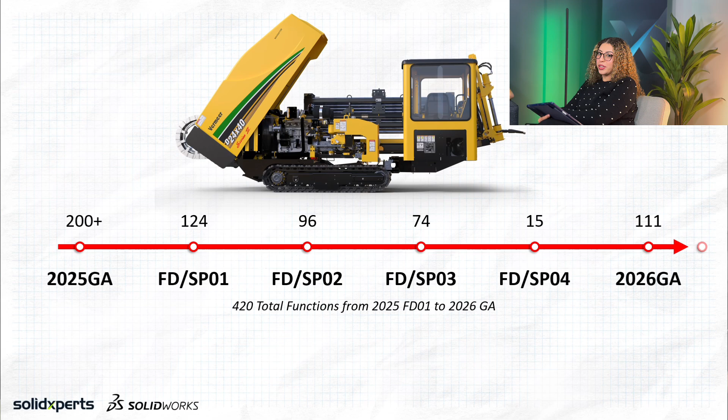Ready? Let's go. I'll be with Eddie to talk you through the highlights of SolidWorks 2026, and trust me, it's really impressive. Good afternoon, everyone. It's always great to be back with Lena and the gang here to go over the great new features being introduced in SolidWorks 2026. So between 2025 FD01 and 2026 GA, there have been over 420 enhancements released, and 2026 will continue to deliver value in each functional delivery throughout the year with performance improvements, software stability, and user-centric enhancements.

So at 22,000 pounds and capable of 24,000 pounds of thrust force, the Vermeer horizontal directional driller has become an industry standard over the last 50 years. These drillers are designed for laying fiber optic lines, power cables, and other utilities without the need to trench, making it possible to incorporate these utilities underneath existing infrastructure such as roads, bridges, and sidewalks.

So this data set will be our roadmap today as we walk through what's new in SolidWorks 2026. All right, here we are, the new features of SolidWorks 2026. This is the part we all wait for and where we find out what's going to save us a lot of time and maybe a few headaches too. So this year, get ready. It's faster, more precise, and practically built for you.

Absolutely, Lena. So the main goal is to make design faster and more intuitive. With the new on-demand component loading feature, you can now open up only the parts you need. That means a huge performance boost, especially when working with large assemblies.

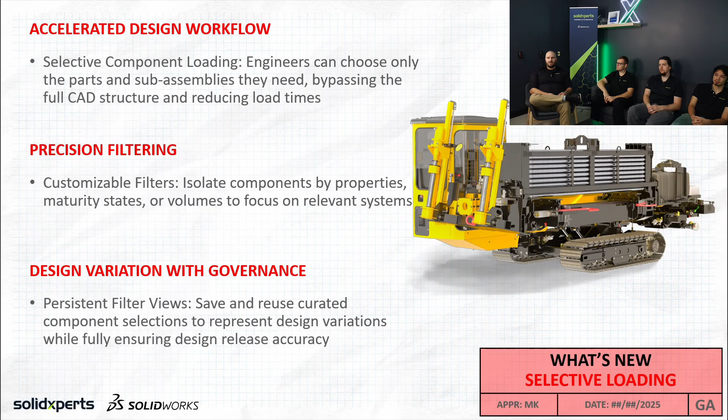So working with large assemblies can be challenging. The only way to have total context of your design is to open up the parts that you don't need in order to get to the parts that you do need. Selective loading allows us to start in a lightweight browser application in order to filter out the parts that we want to work on. Here we can graphically select the parts we want, completely independent of the underlying CAD structure.

And save this filtered view for later on. Instead of waiting for every mate reference and component to load, we can open up the filtered view with only the parts we need in order to begin designing faster.

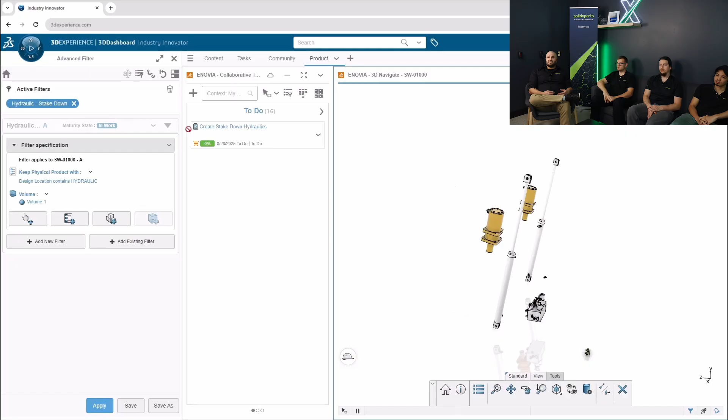Filtering goes much further than just parts or subassemblies. We're able to filter by custom properties, maturity states, or even volumes. These filters can be assigned to tasks as well for efficient design communication. This eliminates the time spent opening and digging through large assemblies, allowing designers to work with more specific model information.

As mentioned, these saved filters can act as curated views representing different variations of your assembly and can be referenced directly in your design documentation, meaning that you can reference these views in drawings, keeping your documentation accurate and up to date, while showcasing exactly the components you intend.

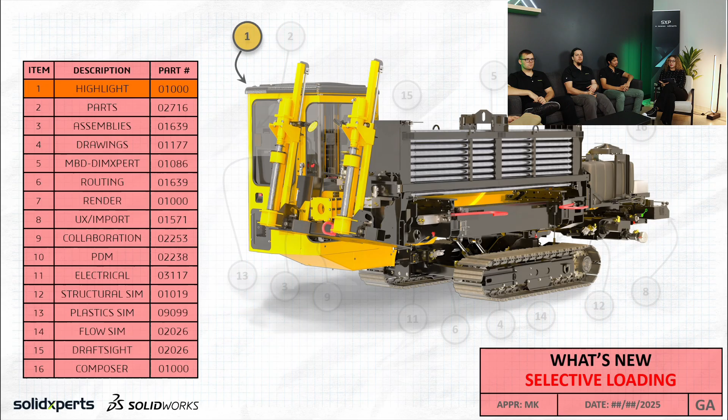It's really interesting. So that means less loading and more efficiency? Sounds like everyone's going to love that. Now we've seen the main highlights. I'll let Eddie keep going, there's a lot of things to see. Much appreciated, Lena. There's definitely more to explore, as powerful part creation and modification is what we've come to expect from SolidWorks.

SolidWorks 2026 continues to enhance part creation with new improvements to sheet metal, equations, structure systems, the ability to leverage Cutlist properties for PLM and ERP systems, and enhancements to reference geometry.

New for sheet metal in SolidWorks 2026 is the ability to offset base flange extrusions right from the sketch plane. Similar to a standard extrude, base flanges can now be offset by a specific amount, by a vertex, or a surface, face, or plane, giving you greater control over your sheet metal design.

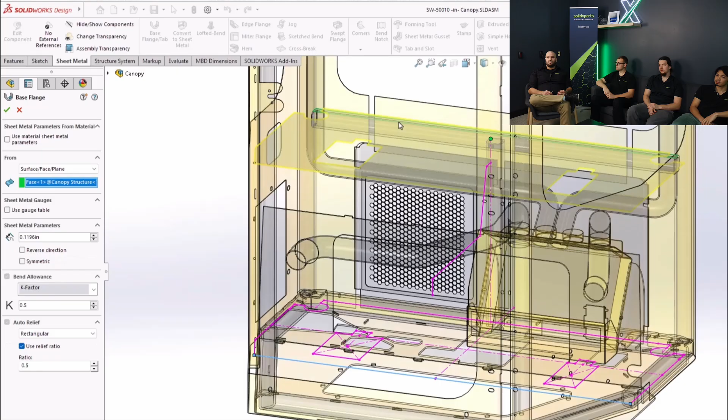Breaking exterior corners on sheet metal parts has always been a quick operation with the break corners tool. New for 2026, break corners can be applied to both interior and exterior corners, saving time compared to manual edge selection.

Equations are a great way to apply conditions or create links in sketches and features that would otherwise not be possible. However, when a feature or sketch containing those equations is deleted, we end up with errors in the design tree due to dangling equations. With SolidWorks 2026, we can simply select the Delete Equations checkbox to automatically delete those equations, keeping your design tree clean and allowing you to continue with your design.

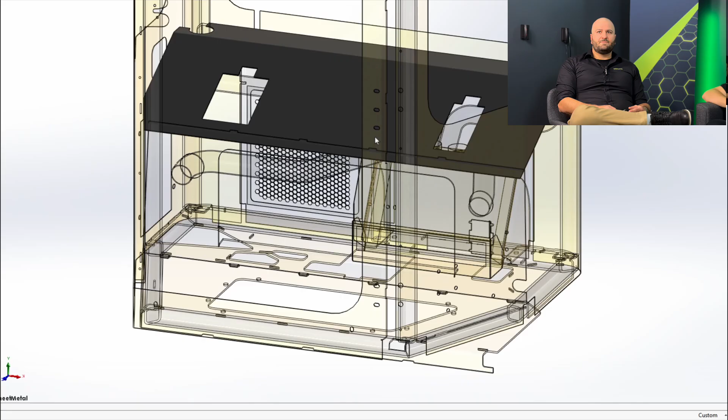Structure systems are a great way to create welded structures without having to sketch every single line. Corner treatments are also easier to apply. New for SolidWorks 2026, the corner treatment process has been updated with more consistent colors to indicate corner type, and a new graphical selection pane where selecting the complex corner to modify becomes even easier. Better previews and easier selection allow you to work faster and more effectively with structure systems.

Cutlists are a great way to gather like bodies in order to quickly make a bill of materials for your projects. However, sometimes it's hard to access that information for use in downstream workflows. SolidWorks 2026 now allows you to reference Cutlist properties, such as description, total length, and more, in the part configuration properties, making information easily accessible without having to rely on any sort of workaround.

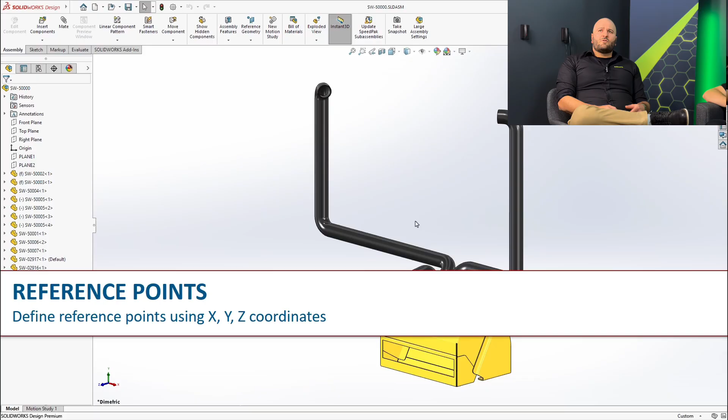Finally, reference points. Reference points are a great way to provide precise location in 3D space without having to use any sketch or model geometry, providing consistent references to build upon. In SolidWorks 2026, we can now create a reference point using XYZ coordinate values, as shown here, to map out a path for a sweep, which would have otherwise been a challenging 3D sketch.

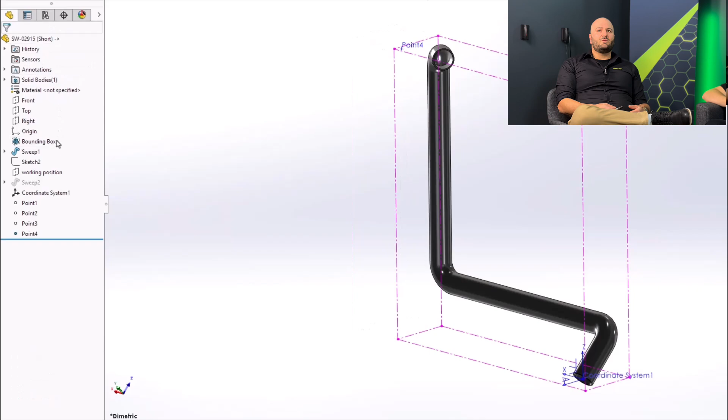Bounding boxes are usually used to give us the lowest volume box around a cylinder or an object. In some cases, we don't always want the smallest volume; we want to be able to orient the box along a specific plane. SolidWorks 2026 allows users to specify the direction of the bounding box based on a user-defined coordinate system. In our example, we can see how the bounding box length of 30 inches does not change, even though the width of the part changes from 33 to 27 inches when changing configuration.

A lot of great new features aimed at speed and usability for part designers. Moving right along, SolidWorks 2026 is also bringing in new features for assemblies aimed at increasing efficiency of common workflows.

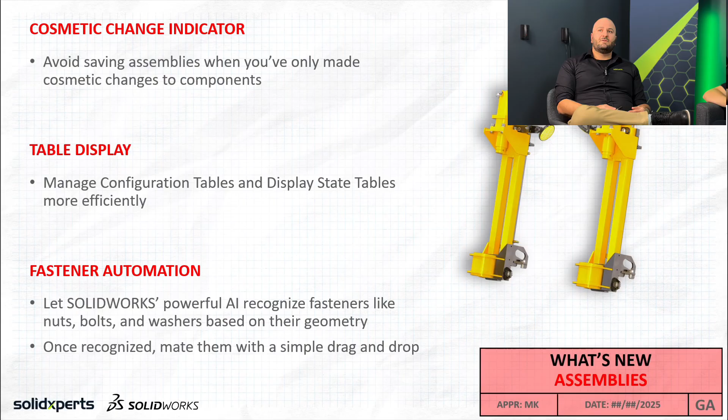When working with assemblies, every save requires time to transfer the data to a local or network drive or the cloud. Reducing unnecessary saves helps you work faster. The new assembly save indicator now lets you know that only cosmetic changes have been made that do not require a save of the top level assembly.

These types of cosmetic changes include the addition of reference geometry or the modification of unabsorbed sketches, and decals are another good example of a strictly cosmetic change to a part. As long as there's no operation that created a physical change to the assembly, the save flag will be placed in square brackets, indicating that the top level assembly does not need to be saved. SolidWorks 2026 will also notify you when saving the assembly.

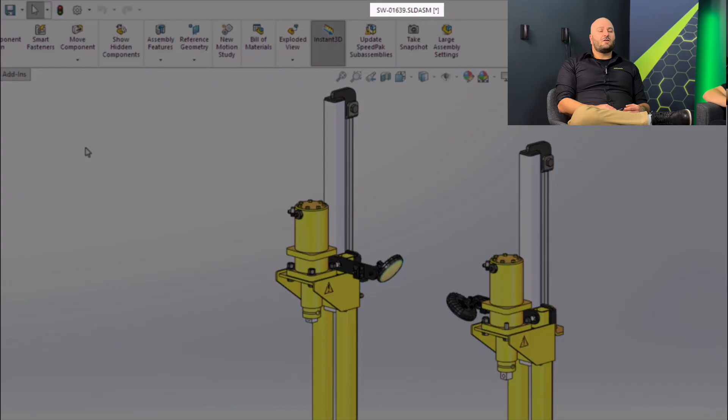Display states are a great way to manage component visibility and appearances without the performance overhead of a configuration. In SolidWorks 2026, tables are rendered quickly, with all columns being fully adjustable. Reference display states in the subassembly are more accessible, with rows being enabled and disabled consistently through the drop-down menu.

Configuration tables are also easier to work with. When we double-click an item in the graphics area to add it to the table, you'll only see the suppress column to start with, the remaining columns still being available through the drop-down menu.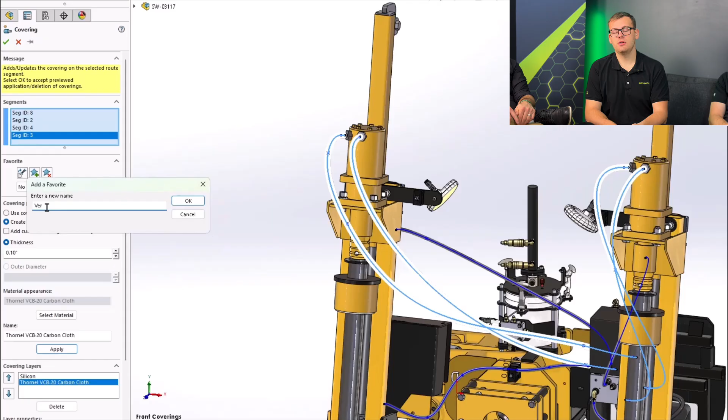Another cool tool is the new sketch guided auto route. We can predefine a route via a 3D sketch, which allows users to save a large amount of time that would otherwise be spent manually editing the results of an auto route feature. Within the auto route command, we can select a guided route using a 3D sketch, selecting the sketch and the splines we want it to follow, so our route follows the exact path we want.

Another cool feature is with sheet formats now. In 2026, when you're changing the sheet format of a drawing with a flattened route, the tables will automatically maintain their scale, limiting the amount of formatting changes a user might have to make. You will still have to adjust the tables on this sheet, but it does limit the number of changes needed.

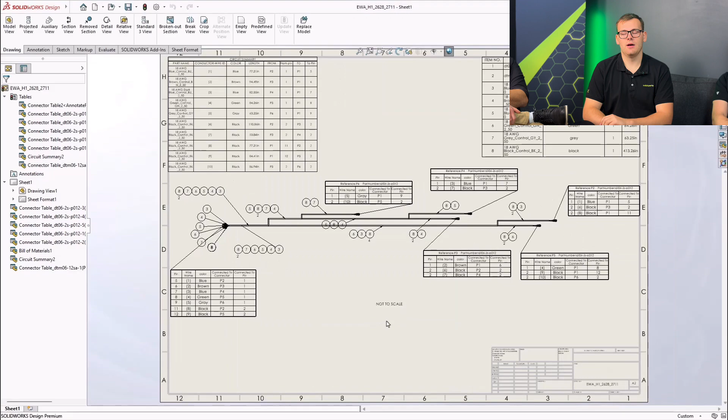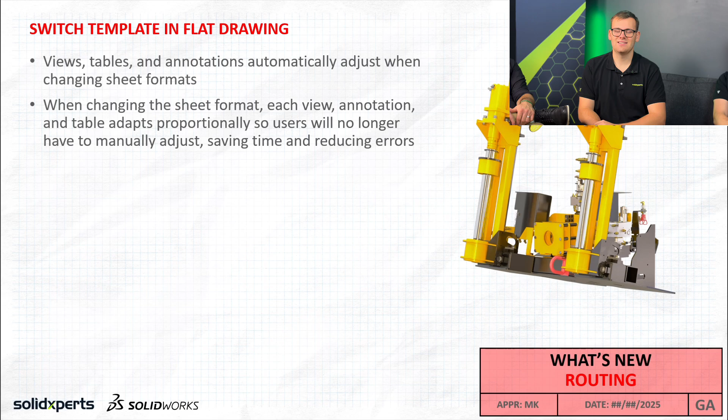So as a review of those routing changes, we have our improved coverings, being able to introduce a library of favorites throughout all projects, as well as using the sketch-guided auto route to predefine the path you would like an auto route to follow. And lastly, being able to switch your template in the flat view drawings while maintaining the scale of those tables.

But that's what I have for routing in 2026, so let's jump right into rendering.

There's a huge change for rendering in 2026. The biggest for me is the DSPBR appearances. The entire Dassault appearance library in 2026 has been replaced with DSPBR appearances, which leads to better presentation even within the basic mapping.

Legacy appearances, any appearances that you've applied before SOLIDWORKS 2026, will need to be updated to obtain the new DSPBR appearances. But this allows images to be mapped with textures onto the geometry.

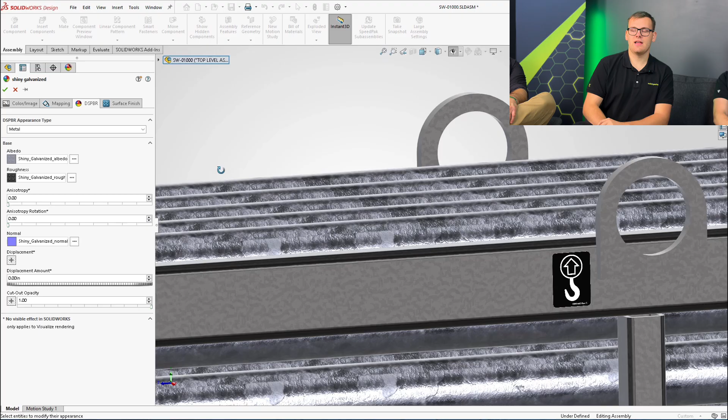These new appearances will better translate into SOLIDWORKS Visualize, more one-to-one than ever before. This is the format that Visualize already uses, and there's a new tab that allows you to load in maps, either custom or ones that you already have in your library.

Additionally, rendering from SOLIDWORKS - PhotoView 360 was sunset a few years back in favor of the SOLIDWORKS Visualize platform, but many clients were left desiring a visualize and rendering capability directly within SOLIDWORKS. Within 2026, users gained the capability of running SOLIDWORKS Visualize from directly within SOLIDWORKS, skipping the extra steps of exiting the main software for basic renderings.

Last but not least, our fast mode has been updated once again to be even faster than before, and it is now supported by AMD GPUs, so more users can take effect. You can see while we're modifying the appearance of our rendering, there's no snow globing effect anymore, and the rendering is just faster and crisper than ever.

So as a recap of those, the DSPBR appearances are fantastic because now you know exactly what it's going to look like when you go into Visualize with those appearances. The rendering from SOLIDWORKS skips that extra step for, I would say, probably 80% of renderings when you don't need to make major changes to your background.

And also, the support of fast mode for AMD GPUs is fantastic because now more people get to experience the crispness of fast mode. And that is what I have for rendering.

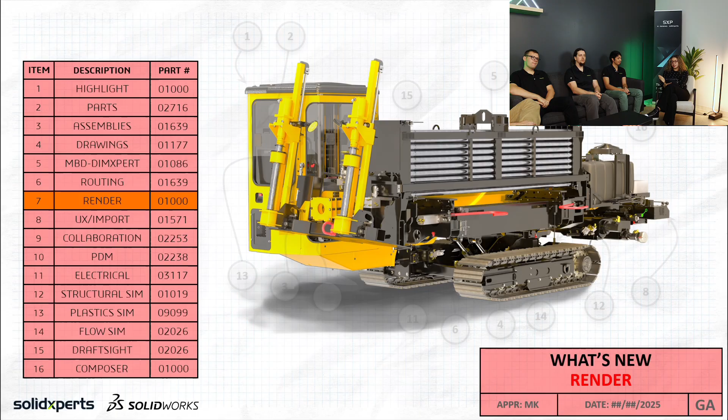Thank you, Aiden. So between the new routing and the amazing renders, that's really impressive. But great design also needs to be easy to use. And on that side, Michael has some really cool stuff to show us.

Yeah, thank you very much, Lena, and thanks, Aiden, for that excellent presentation on rendering. So let's talk about user experience.

Every year, when new versions of SOLIDWORKS are released, we hear familiar themes, right? Speed, efficiency, and ease of use. But ultimately, all things come down to one goal: making the user experience better. So let's take a look at how SOLIDWORKS 2026 improves the user experience.

You can now import neutral CAD files like STEP or IGES in the background. This lets you continue working on your models while they load, which is a huge boost to your efficiency.

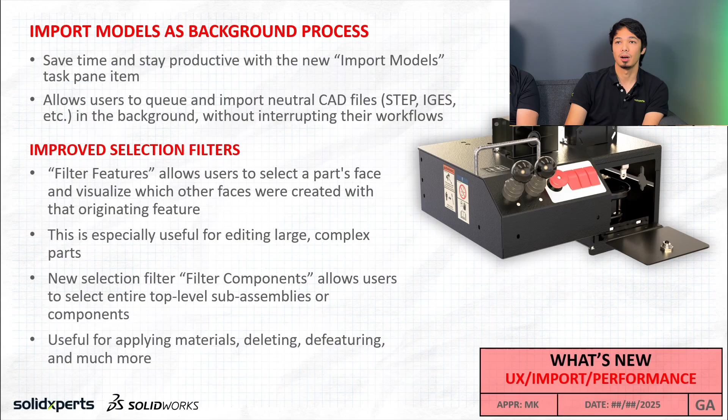We now have improved selection filters, which makes editing complex parts easier. We have filter features, which will highlight all your faces created by the same feature. We also have filter components, which will let you quickly select entire subassemblies for applying materials, defeaturing, or other cleanup operations. For imported geometry, you can select a large number of bodies using a size slider or volume box, which is perfect for removing small stray bodies.

There's also a new dismissed message icon, which will improve visibility of alerts. And finally, graphic rebuilds now perform faster for complex features.

So let's see how some of these enhancements look within our SOLIDWORKS environment, starting with that background importer. This gives you the ability to import models in the background, and this is a huge game changer for productivity. Anyone who's ever imported a large step file knows how frustrating it can be to just sit there and wait for it to finish before doing anything else.

Now instead of locking up your software, you can queue up multiple imported files right from the new task pane, and then continue working as those imports process quietly in the background. Whenever they're ready, you'll get a quick notification letting you know, and you can keep working and let SOLIDWORKS do the heavy lifting for you.

Selection filters. This next one focuses on our selection filters. There are actually two new ones that make working in assemblies and parts much faster.

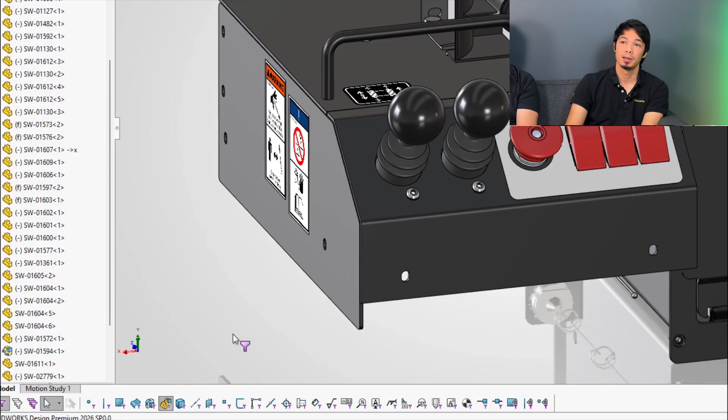Let's look at the first one, filter components. When this one is active in an assembly, anything you click in the graphics area will automatically select the top level subassembly or component under your cursor. That means no more digging around through nested structures. You always get the right selection instantly.

The second filter is filter features, and it's especially useful in parts. Imagine clicking a face, for example, one created by a fillet. All other faces created by that same feature will highlight in the graphics area and in the feature manager design tree. This update is incredibly helpful when working with complex parts or models that you didn't create yourself.

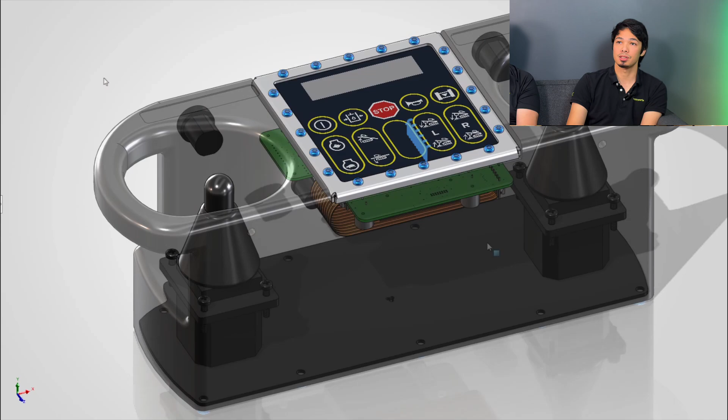This last set of enhancements introduces two new selection tools that make it easier to manage our large complex models. The first is select bodies by size. Imagine working with a multi-body part that contains hundreds of tiny components, like bolts or screws. Now there's a slider that lets you progressively select bodies based on their size. This is great for cleaning up heavy files, for creating lightweight configurations, for example.

Our second tool is select bodies by volume. It brings a familiar capability from assemblies into the part environment, so you can sketch or drag a 3D bounding box directly in the graphics area, and then everything within that volume is selected automatically. This makes it much easier to isolate regions of your model, remove unnecessary geometry, or simplify your imported parts.

So together, these updates, our background importer, smarter filters, and our new selection tools, they all target one simple goal: a smoother, faster, and more efficient user experience. It's about reducing friction, improving clarity, and keeping you focused on your design, not on the software.

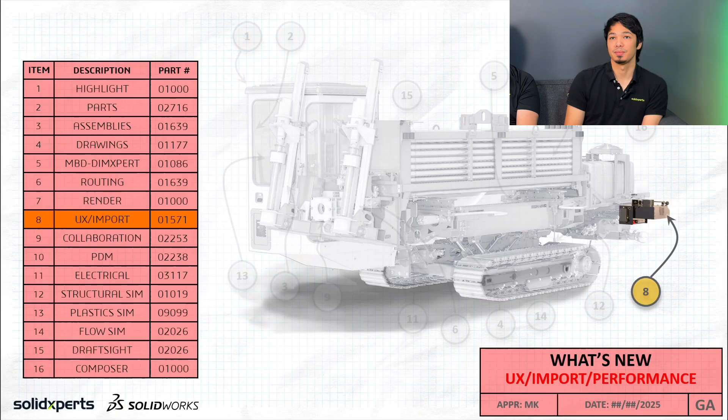So let's take a look at improvements now to collaboration in 2026. Collaboration has always been at the heart of SOLIDWORKS, and in 2026 it takes another huge leap forward. This year's focus is all about working smarter, not harder, connecting our people, data, and design intent more seamlessly than ever before. I'm excited to show you this portion because I have a whole bunch of little goodies to show you.

Let's look at how 3D Experience enhances collaboration in 2026. We have the AI companion Aura, which helps summarize information and perform natural language searches. You can now save configurations as new parts or assemblies directly on the 3D Experience platform, as well as connect with peers through in-app forums.

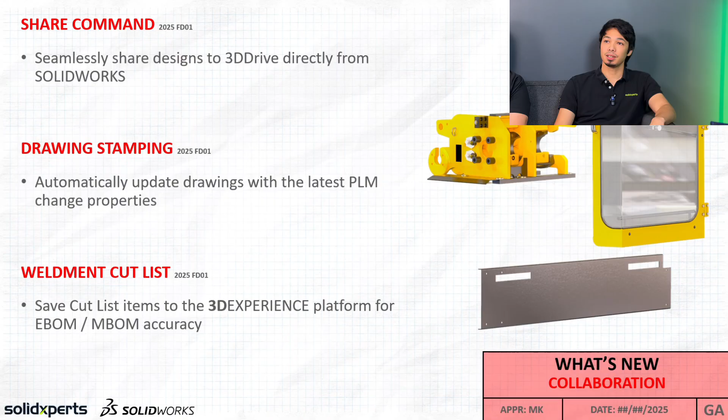Sharing is easier than ever. With the share command in SOLIDWORKS, you can share designs to 3D Drive seamlessly. Drawing stamping has also been improved so that it automatically updates your PLM properties. And for manufacturing, weldment cut lists now sync to the platform for accurate EBOMs and MBOMs.

Looking at design tables, they can now be securely stored on the platform, while our deformable components have also been improved for complex assembly management. Next up, we also have some updates to the bookmark editor app, so our bookmarks on the platform will update automatically, and they've also streamlined the navigation in bookmark editor as well.

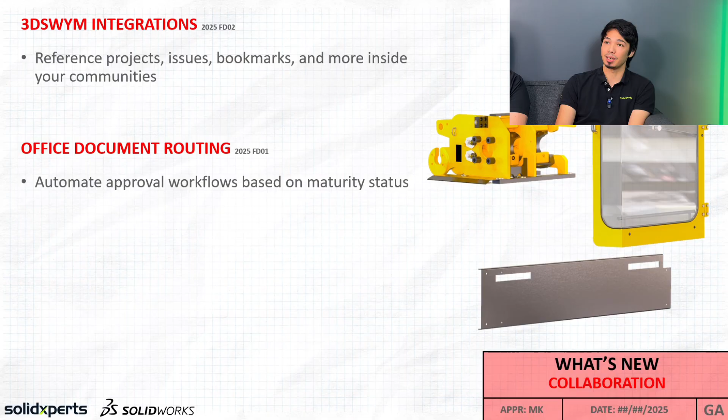Finally, improved 3DSWYM integrations actually connect you to your projects, your issues, and communities, while workflow automation in the platform is improved with document routing based on maturities. So let's check out some of these enhancements and what they look like in real time.

So let's start off with Aura, our SOLIDWORKS built-in AI assistant. Aura is not just a chatbot, it is a powerful context-aware tool that helps you summarize information, search naturally, and stay focused on what matters.

With the new Aura integration into 3DSWYM, teams can instantly summarize community posts, wikis, questions, and ideas. Imagine scrolling through a long technical discussion in your project community. Instead of reading through dozens of replies between your colleagues, you can now just ask Aura to summarize the key points for you. But it's not just about summaries.

Aura can also pull context from entire communities or threads to help you make smarter conversations. So ultimately, Aura empowers every SOLIDWORKS user to get answers instantly, learn continuously, and collaborate intelligently, all without leaving the SOLIDWORKS ecosystem.

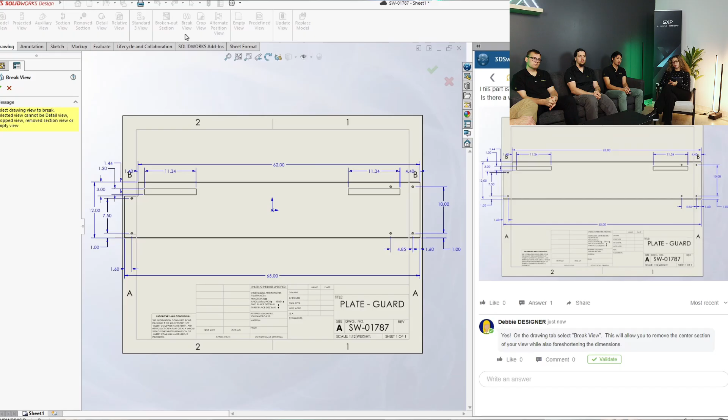The second big enhancement that I want to show you focuses on how and where collaboration happens. So in SOLIDWORKS 2026, collaboration now actually happens directly within the SOLIDWORKS interface. You can access the SOLIDWORKS user forum and connect with industry peers right from your workspace. You can share data seamlessly through 3DDrive and 3DSWYM, all without ever switching applications or worrying about file formats, storage locations, or conversion errors.

So what does this mean? Collaboration is now a part of the design experience itself. It's not just a separate task that happens afterwards. Think about how your design reviews typically work. Exporting files, uploading them to cloud storage, waiting for feedback. That's friction, right? And we're trying to avoid that with all of these enhancements.

Now imagine being able to share your model directly from SOLIDWORKS instantly. Start a conversation in 3DSWYM or send a 3D Drive link directly to your team, all from within the SOLIDWORKS environment. You don't lose context, you don't lose time, you don't risk working with outdated versions of your files.

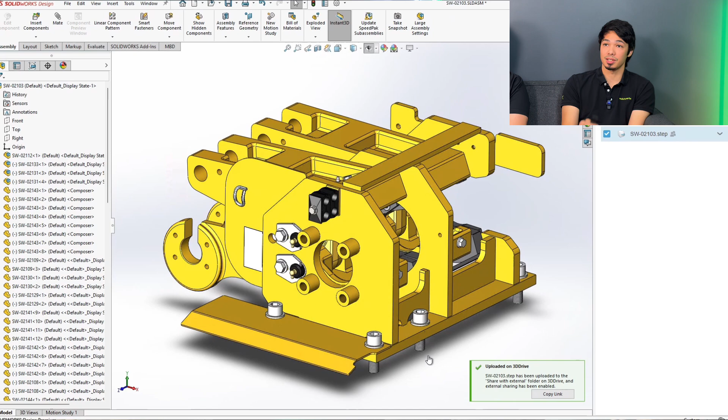This is especially powerful for multi-site teams, for anyone working in hybrid environments where collaboration tools need to be reliable and in real time. It's a huge step forward in unifying our design creation, communication, and collaboration into one connected experience.

Speaking of working in SOLIDWORKS, here's a great enhancement that I've actually had customers ask me for directly, and that's the ability to save our configurations as a new part or assembly on the 3D Experience platform. Check out how easy it is to do.

This last one is all about control and governance, so something every engineering organization values, at least I hope. With document routing, the platform now automates approval workflows as your documents evolve. So whenever a file changes maturity states, for example, from in work to released, we have predefined routing templates that are triggered automatically. That means our approvals are consistent, traceable, and fully auditable across our entire organization.

No more manual tracking or missed sign-offs. Every change is logged, and every stakeholder is notified. And that's all I have for you today for my part.

Thanks for listening. That's really interesting. Thank you, Michael. Everything feels like more clear, smoother, and easy to work with.

Now, let's bring in René, who'll show us how PDM keeps everything organized and connected.

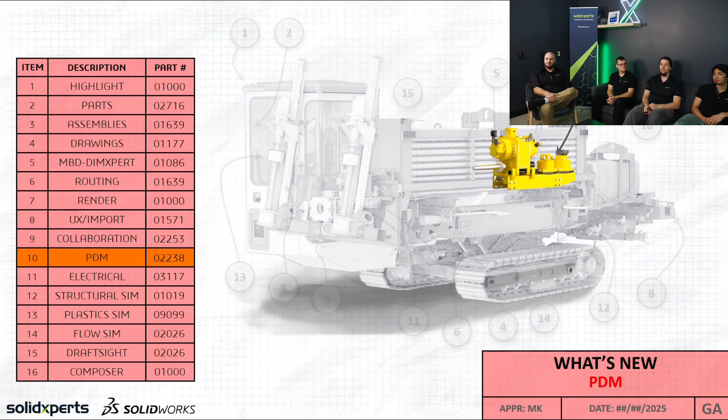We're talking smarter searches, better visibility into your files, workflows, and more control over data and an overall smoother experience. Behind the scenes, we've also tightened up our security and enhanced encryption standards so your data stays safe without you having to think about it. Let's take a look at the latest features one by one and show how they can make a real difference in your PDM experience.

First, the split search button now makes it easier to access recent searches or launch advanced searches in one click. No more rebuilding the same search repeatedly. It's just so that you can get your results faster with less effort.

Search favorites can now have editable placeholder text before running searches. This means fewer unwanted attempts and more accurate results right from the start. Search cards also now have the ability to give exact matches for text or to have the generic wildcard search options, which can be controlled by your Vault admins.

We've also added the transfer ownership feature. This allows a file to be reassigned from one user to another without requiring the original owner to check it into the Vault. This is useful when someone's unavailable because they're stuck in unending Teams meetings, or if someone went on vacation before they checked their files back into the Vault.

Revision information is now easier to see, with revision variables being added by default to the Contains and Where Used tabs. You get immediate context on revisions without opening extra windows, making lifecycle impacts and management assessments faster.

We've also updated our embedded previews, so now inside of the embedded eDrawings preview, directly inside of your client view, you can see step and Parasolid files without needing to launch a separate application or open them directly inside of Solidworks.

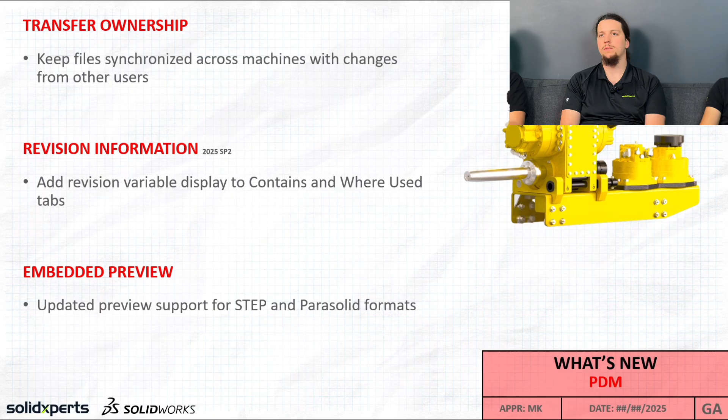We've also added more features for folder access rights for your admin. Users can now navigate directly to lower level folders without needing permissions of the parent folders above it. This removes access bottlenecks while keeping security on the folder level intact.

Web 2 now has the bill of materials, so saved BOMs will now appear in a cleaner, collapsible panel. Reviewing product structure data is now faster and easier without having to navigate multiple windows or tabs.

And the convert task now supports flexible file conversions, full version control, and advanced scripting options, giving administrators more control over neutral file formats that are being converted for downstream manufacturing processes or for your documentation needs.

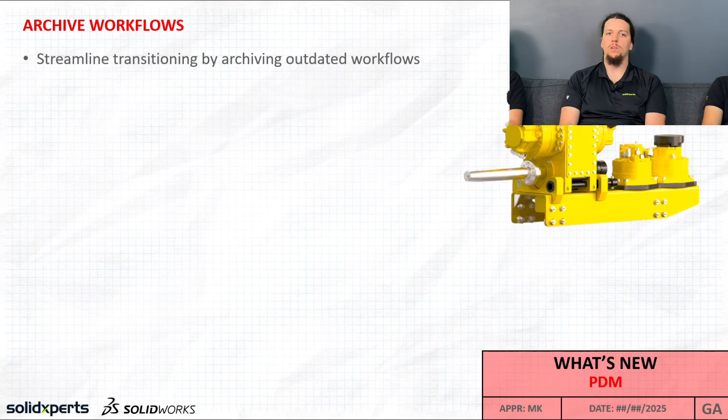Also added for 2026 is the ability to archive workflows. For anyone who has worked as a PDM admin who's had to remove or update PDM workflows in the past, they know if you were moving from a previously existing workflow, this could be a huge pain. This new feature will make it easier and more seamless to remove unused or no longer relevant workflows from your Vault.

So starting with our demonstrations here, we can see with our integrated search, we've now been able to have that split search feature, so we can get to our saved favorites or other save options that we want easier and faster. With our search favorites, we also have the ability to choose if we want to run those favorites with the saved data directly inside of them when opened, or if we want to open our saved favorite with placeholder text in place, so that we can modify small pieces of text from favorites that we typically run, so that we can run our results without having to first do that initial search.

With our search cards, we have the ability to fine-tune the data that we are looking for. We can fine-tune this more on the admin side by giving the search card the default options to either look for exact text if you want users to find exactly as they type, or the standard wildcards used where it'll find the text that's best fit.

The transfer ownership tool is now brought directly into our interface. So transfer ownership allows for easier collaboration between designers and approvers. With files checked out by your user, you can now directly transfer files to other members of the design team or approval team without needing to first check them in. Other users can also request ownership or take ownership of files checked out by another user while you are unavailable, either due to a meeting or to other conflicts.

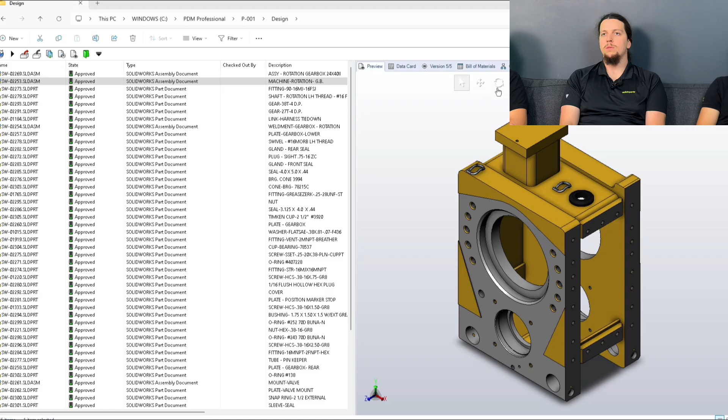The revision information has been added in more locations. So as mentioned before, the Contains and Where Used tabs will now have the revision column by default, giving more access to your users about information involving the revisions of parent files or child components to a top-level assembly that you are going to be modifying.

The embedded preview has been updated, so as stated before, we are now able to see our STEP files as well as Parasolid file types directly in the eDrawings preview of our PDM client, preventing the need to open in another software or having to look at this inside of Solidworks before opening.

With our improved folder access rights, we can see users can be set to only have access to the subfolders that they would need. This is great for contractors as well as interns, so that they'll be able to only see the files that they need buried beneath a project folder or beneath a product structure without needing to have write access or read access to any of the parent folders feeding to this. This will make it faster and easier for people to navigate to their work.

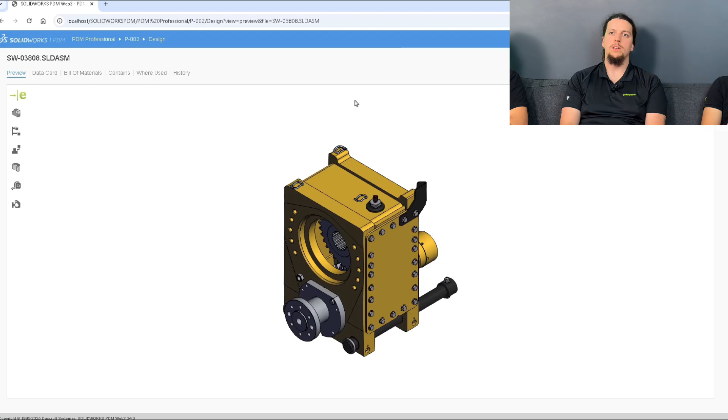With the Web2 bill of materials, we now have an easy to view panel that has been added into our web client viewer. So for any customers taking advantage of the Web2 application in PDM Pro, we've now integrated easier use of named BOMs if you're saving those off. This makes it easier for customers using their PDM system to create engineering documentation as well as product information in a more easily seen and viewable location.

With the convert task in 2026, we've added more features to our conversion options, giving you greater control over the types of files being created, the formats they're saved in, and the versions and revisions assigned to these files after they've been saved to your vault, giving better control over documentation for downstream processes or sharing information inside your company.

We've also brought in category properties. A new default condition in category properties now uses the file path type. This helps ensure files are automatically categorized correctly, reducing the amount of manual adjustments needed.

We've also added, for admins, a warning for same user login. This will warn admins that they've been signed into the admin tool on more than one device, letting them know if they've accidentally forgotten to sign out of a secondary device, as well as knowing if someone else is already using a shared admin account.

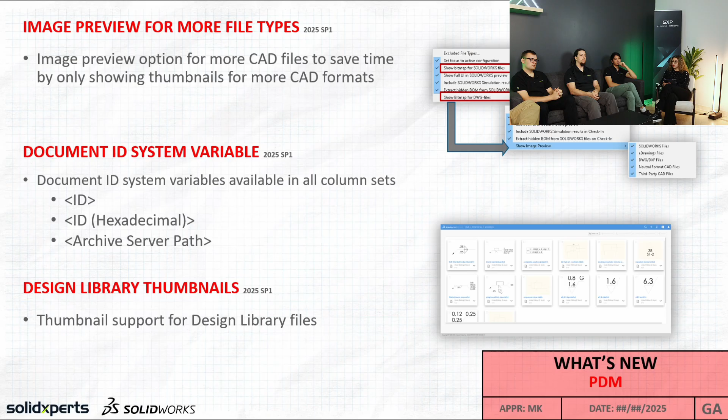Image preview is now available for more file types. The thumbnail preview can now support more CAD formats. Users can visibly confirm files without opening them, saving time browsing for files with similar names or descriptions. Document ID system variables, including ID, ID hexadecimal, and archive server path, are now available in all column sets, making it easier to see key identifiers when working inside your vault. And the design library thumbnails are now included in the preview, making it easier to browse for files and see different features in your design libraries inside our user interface.

And that's going to wrap up our new features for SolidWorks PDM in 2026. And I'll be handing it off to Lena now.

Thank you a lot, René. Everything fits together in this version and you can see it. So now we're back with Aiden for simulation and electrical, more powerful, more accurate, and faster than ever, because even after 30 years, SolidWorks just keeps pushing its limits.

Thank you, Lena. I'm happy to jump into SolidWorks Electrical with the first feature being the part reference import. The import feature from Excel was added last year; however, this year it was upgraded again with the ability to truncate what needs to be entered, allowing the setup to be way faster. You can enter the desired values once and apply it to all the designated terminals in a circuit or designated parts.

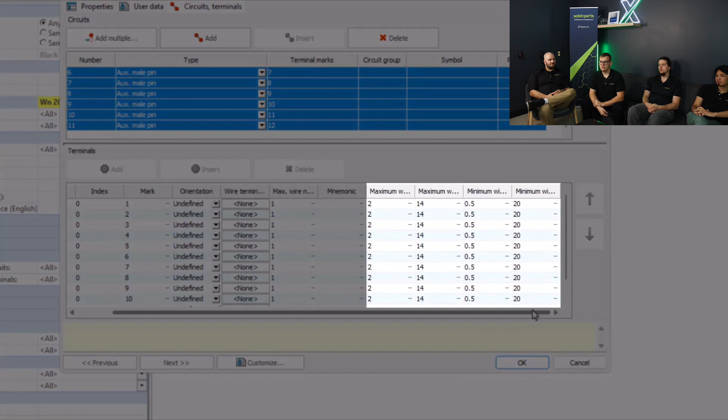You select simulate and then import it to see it take effect. Checking the results, we can see that the maximum wire number and minimum and maximum wire size are all included for each of the terminals. A customer has reported that they were able to import 65,000 parts using this method at once.

Additionally, we have updates to the dynamic connectors. There is a selected circuits breakout that's been added so that you can filter, reorder, and multi-select the terminals. This is most helpful for clients using massive connectors with lots and lots of terminals to select.

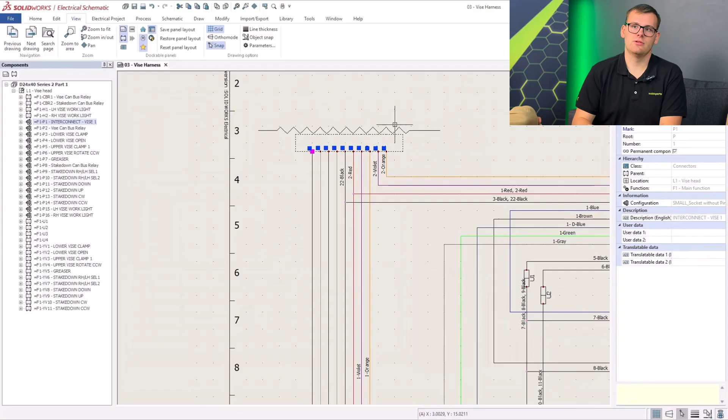Additionally, with accessory parts, in 2026 we can assign accessory parts to circuits and terminals. That allows us to have both richer bill of materials and reports, as well as not needing to include additional parts that aren't necessarily included in the final schematic, just so we can have those terminals visual. You can see here extra columns on that table because of the associated accessory parts.

And export to PDF, this feature has been upgraded as well, allowing us to select the structure to be exported between book, project, and page, as well as the orientation of the pages being exported. So we can force all of the pages to be horizontal, vertical, or it can be a mixed schematic, as shown when we export this file here. Here you can see we have both horizontal and vertical PDFs exported.

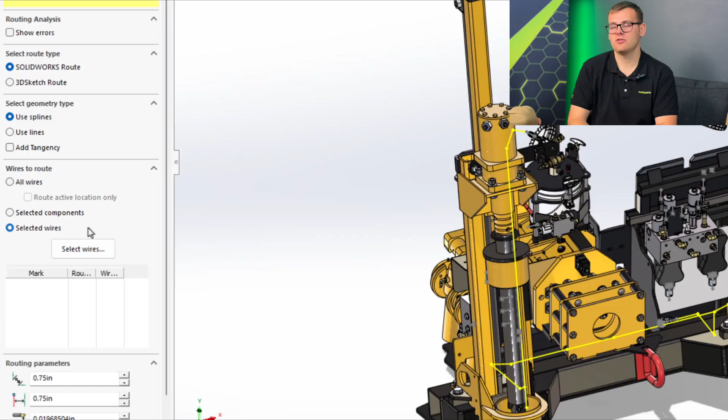And routing selected wires: we now have the select wires option within auto route, which allows you to specify which wire should be routed. It prevents all wires from being routed at once and along the same path, because often we want our different wires to follow different paths. Each wire, when it's added, each wire type will have its own assembly, and as more wires of that same type are added, they will be added into the assembly for better organization within your assembly tree.

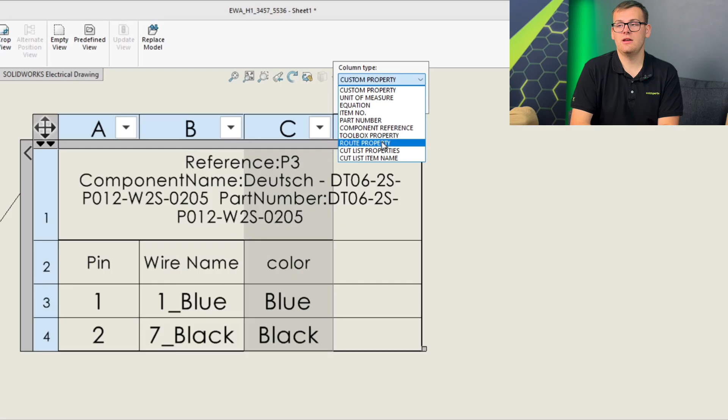Additionally, on connector tables, there is a new column type that's been added, called route properties, which includes a lot of new properties, for example connected to a connector, connected to a pin, and signal name. We can see here in the drop-down all of those properties added. And when you update an item on a table, you can apply it to all similar tables throughout your drawing, as shown here.

So as a little recap, the manufacturer part and cable reference import was greatly improved, so you don't need to write the same value a thousand times for all of your parts. The dynamic connector table is really helpful, especially being able to multi-select the terminals you want to include or not include, and being able to assign accessory parts, making it way easier to represent what you're actually going to be including in your finalized schematic.

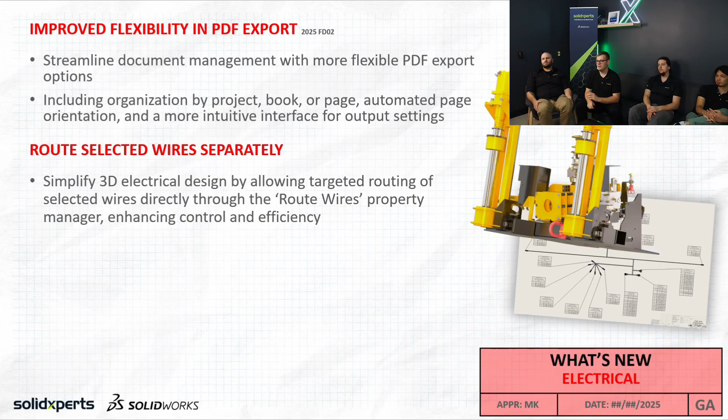Additionally, that PDF export, being able to orient the pages in the desired way, is really helpful, as well as being able to route the selected wires individually. That way you don't have to route all of your wires at once along a common route.

Some other features not yet shown: we enhanced the connector table, adding a whole bunch of features that you can include onto those tables, as well as some tooltips for when you're routing your wires and cables. That will be released at a later date.

We can also batch edit the wire stub lengths, so we can add a common stub length to all wires being routed at once. Another helpful feature for time saving.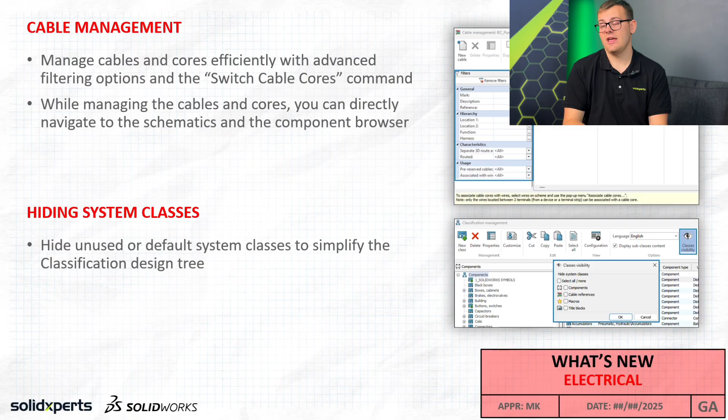Our cable management: we have new advanced filtering options that have been added to the cable management tab, which aids in navigation to the applicable schematic from the component browser directly. Additionally, customers can now hide the default classifications if desired, allowing only custom classifications to be shown if they want to, because before you could hide custom classifications but you couldn't hide the defaults. So now you can hide any and keep just the ones you want.

Additionally, previously circuit information had to be matched 100% when you were updating your manufacturer parts, but now you can replace a manufacturer part with one that has more circuits. You can't go to less, obviously, because you need to have at least the same number of terminals being utilized from before, but we can add bigger parts in where we need more space.

Additionally, the collaborative server has been enhanced, and now it only requires open ports on the firewall from the server side, not the client side. So there was a lot of issues where clients couldn't connect to the server because of firewall issues, and now that has been mitigated with the new updates.

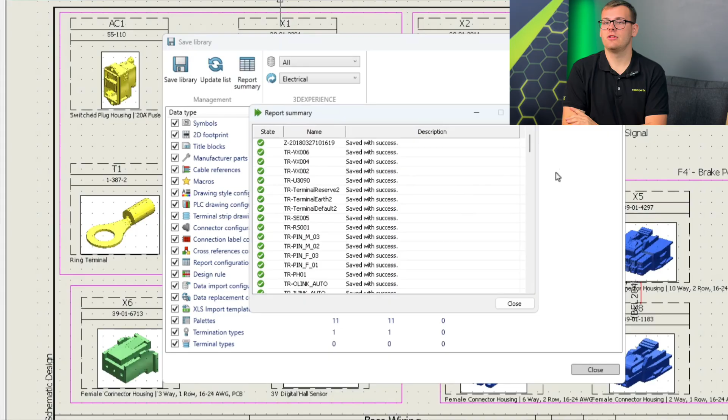The electrical library has now been added to the cloud, so users can utilize from the 3DEXPERIENCE platform the same electrical libraries that they would be using on their desktops. Additionally, there's a new SOLIDWORKS Electrical 3D augmented role that has been added to allow users to use these libraries throughout the cloud.

As a breakdown of what is shown there, the 3D electrical tools in general have been updated, with library management being the key feature. It's been enhanced with new load, unload, and save features, allowing users to save libraries and share them so that the entire company can use a common library. To do this, a new 3D electrical augmented role is available for the 3DExperience platform so that you can use those new library tools.

So that's what I have for electrical in 2026, but we have a lot of new features across our simulation softwares. Let's jump in with structural simulation.

Shell edges have been updated in that remote loads can now be directly applied to the shell edges. This increases the accuracy of our simulations. You do want to ensure though that you are selecting the edges that were used to define the shell initially to make sure that the load is being applied properly.

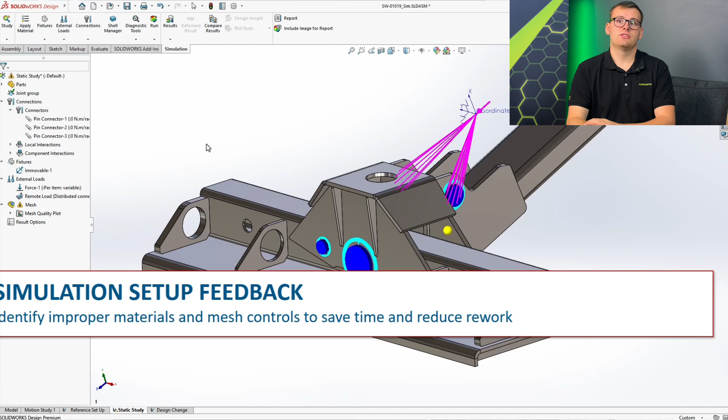Additionally, there's an error message that has been added if you have improper or no materials applied, as well as improper mesh controls. This reduces any unnecessary reworks and reruns that you might have to do because you forgot to add in a material initially. You can copy and paste the name of the part from the error message to do a quick search to identify the part and fix the error before you run the simulation.

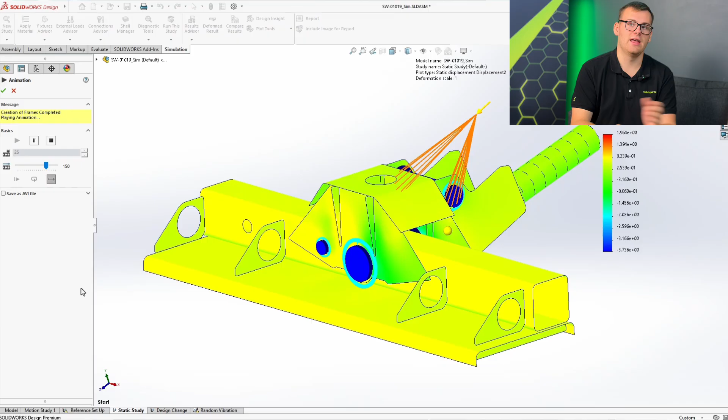Additionally, in 2026, we've introduced a new angular displacement plot in which you can display the rotation around any chosen axis, either in radians or degrees. This prevents any unnecessary conversions between radians or degrees, and it saves a ton of time in comparison to the older methods of getting to an angular plot from a linear plot.

Additionally, shell definitions: in 2026, you can set a global shell default type within the settings. This allows users to specify either a thick or a thin global default, so that if you're using thick shells a lot, you don't have to constantly click that thick shell button every time. You can set that as your default. Obviously, we can still do mixed models where we have both thicks and thins, but it prevents users from needing to override every shell feature created if you use one over the other.

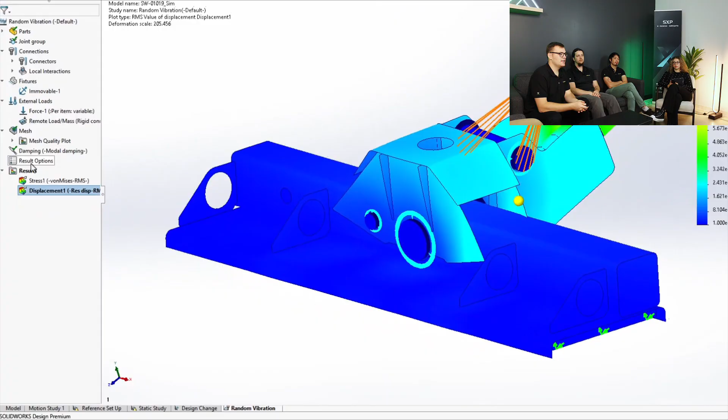Pin connectors can now be used in random vibration studies. This allows the resultant forces to be directly received using the display resultant pin forces. In this example shown, we can use the front pin 1 and display the resultant values on a graph. This allows users to identify any natural harmonic frequencies that may exist within your model from a random vibration that your machine might experience, which could reduce any costly reworks that might appear if you discover this after manufacturing.

As a recap, being able to do your distributed remote loads on shell edges is a fantastic way to simulate your models in a more accurate manner, as well as the overall user experience improvement that warning message provides. Again, I've had to rerun many studies that took tens or more minutes because I forgot to add materials, so that one's really helpful for me.

Rotational displacement - not having to work a linear displacement plot into giving us an angular displacement value - is super helpful as well. A lot of math and time saved on that one.

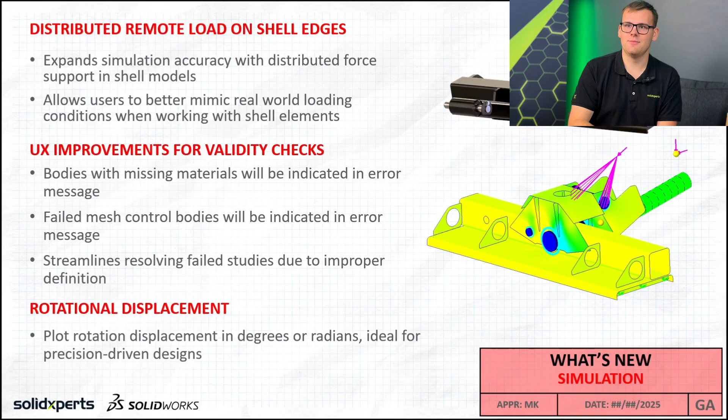Additionally, as simple as setting a global default for the shell values is, it is huge. As somebody who uses thick shells a lot, I hate having to click that button every time. And being able to display the pin connector forces versus having to insert parts, which could be another cause for error, really simplifies our studies.

Moving on to beams, the first being mass and force analysis. Within 2026, users can apply forces on beams either in a per item or total amount. If you're using per item, you can also do a per unit length, so we can distribute those forces evenly. It really just increases the choices a user has to represent your model's loading overall.

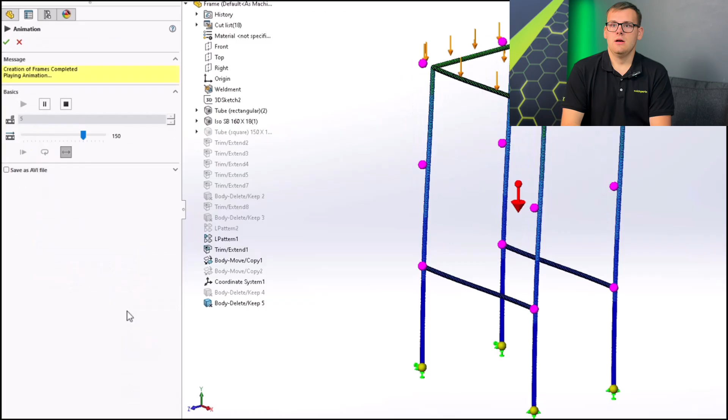Additionally, seismic response studies. Within the response spectrum analysis study, we can add remote loads and masses, which allows us to simplify our models. We don't need to model the whole thing anymore if we know the total mass and loading of it. So we can still maintain the accuracy of the load while simplifying the model and reducing load on our machines.

And for buckling modes, within the structural buckling mode study, we can choose a new option that filters out any negative eigenvalues that we might see, because these values aren't applicable for any studies we would be doing. So we can filter them out with the checkbox as shown, and see just the most relevant positive eigenvalues, having our engineers focus on the right results.

So as a quick recap: being able to distribute our loads better along all of our beams increases the flexibility of the software. The more options you have on how you can load your devices, the better. Additionally, the seismic response study, not having to model the entire building but instead being able to apply the load, is super helpful. And with the buckling modes, again, another simple fix to a problem that should have been fixed a long time ago.

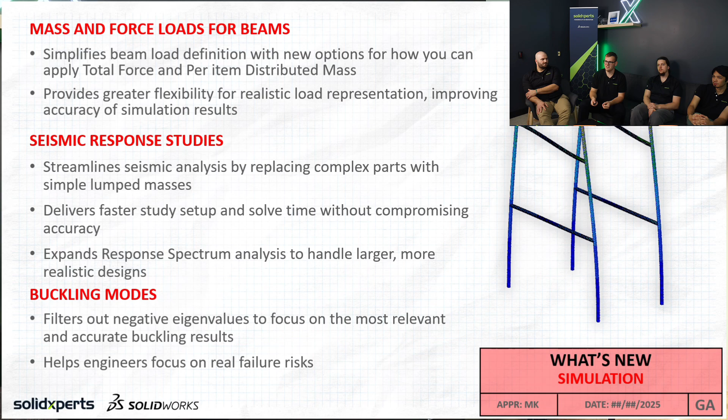Additionally, with performance increases, we have a 28% reduction in run times for some studies that include bolts and other pin connector types. So if you're using connectors a lot, there is a big reduction in runtime there. And in 2026, they fixed an error that would cause an unrunnable study seemingly randomly, where you used to have to remesh and rerun a study. That error no longer exists, so one less thing to worry about.

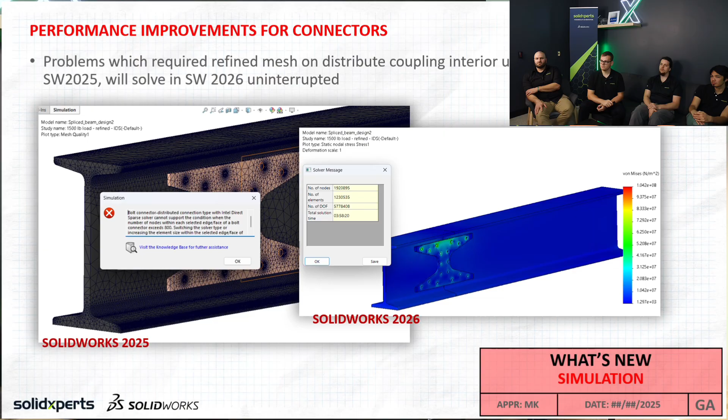Moving on from structural and on to plastics.

The first upgrade to plastics is just a huge update to the material database. They've added 85 new materials and updated 12 material classes. So a huge expansion to the plastics libraries.

However, there's also a new volume plot that has been added. This allows users to quickly identify any unfilled volumes in gray, helping identify any short shots that may exist within plastics. Up top we can see that gray plot, but something many users might have missed before this plot is that there's also a short shot at the bottom here. So that plot helps you identify it.

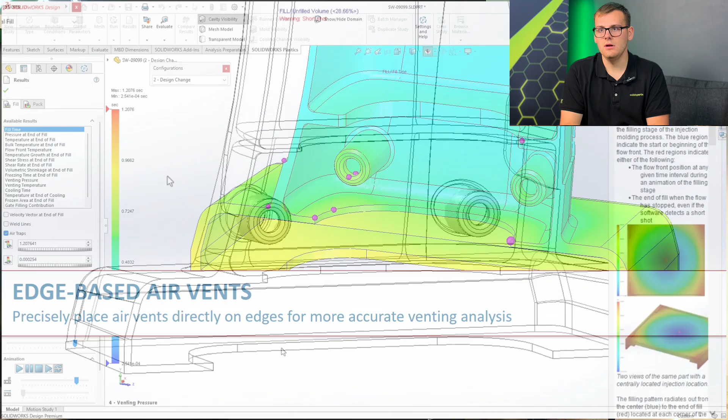Additionally, air vents have been upgraded from previous versions, where now we can use edges to identify where we would like our air vents to exist. This can help decrease pressure in a more natural way, like where the molds might sit together, where air would be venting naturally. You can also see in this case study we selected the edges on the insides of the ribs to help decrease pressure. So when we go back into that air pressure plot, we can see it's decreased over tenfold, I do believe, in this case.

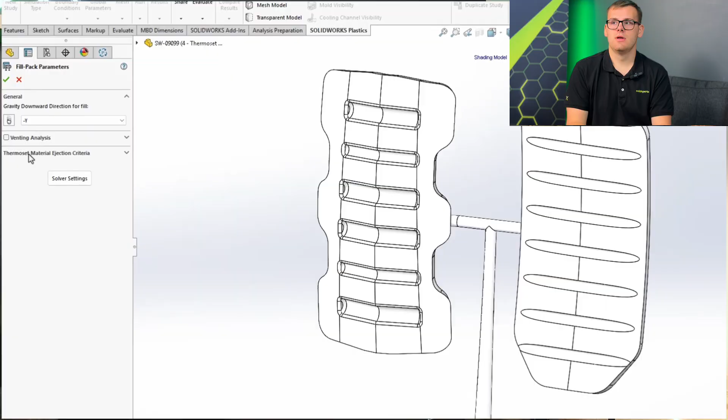And thermoset materials have had a massive update, updating the names for the parameters for ejection as well as adding a new parameter. So the names have been updated to time-based or curing-based. And when you're using curing-based, there's a new field for the percent to reach a curing threshold. So you can set the threshold of how much needs to be cured, a threshold for how much of the volume needs to have reached that, and any initial conversion to take into effect.

Along with a plot to see that curing-based progress.

Alrighty, so as a recap of what I just spoke about: massive updates to the material library are fantastic for everybody. You have more accuracy in the materials you're using in your plastic simulation, as well as vast improvements to the solve times throughout the entire plastics program. So we can see 15% for fill, 25% for cooling, and a 30% time reduction in the packing solver. Those solvers have been improved a huge amount.

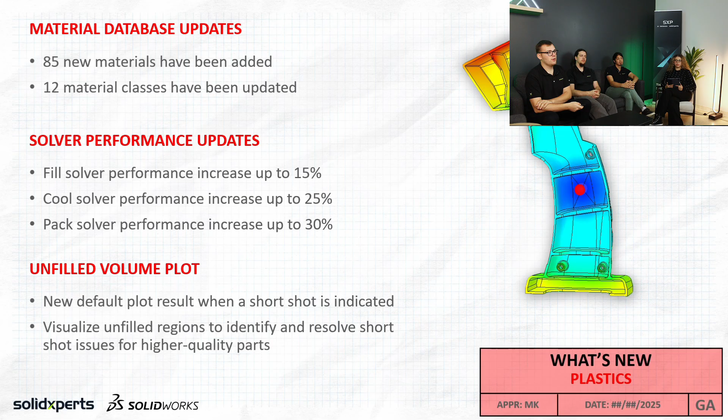That unfilled volume plot was introduced to help identify any short shot regions. Additionally, the edge venting is expanded for more realistic simulations and it helps improve the longevity of your molds, as well as all the thermoset materials being upgraded with new reactive controls and parameters and a few renames to make it a little more intuitive for users.

And moving on from plastics, let's look at flow simulation. All of the changes we have in flow simulation for 2026 will take effect on the first service pack release, so we don't have any live videos to show you today, but we do have some screenshots of the features. The first feature is the total power of surface sources. In previous versions, users trying to determine the power of your surfaces had to go into each source and determine the power, adding them up that way. This year we have a button where you can see all of the surfaces' power sources at once. So way more intuitive and useful for anybody who needs to look at the electrical usage of your enclosure.

Additionally, with two resistor creation, those components can be created automatically either through an engineering database item or via an Excel import, which helps cut down on time when setting up multiples of these features at once. Similar process to before for if it's just one, but now you can copy and paste these features around.

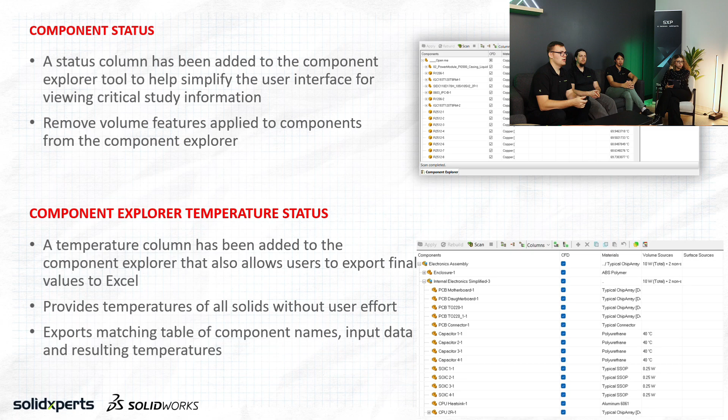Additionally, a temperature column has been directly added into the Component Explorer, which allows the final values to be exported into an Excel document, so all the temperatures of all the solids can be discovered and explored without too much user effort. Way easier than before.

Additionally, users are now able to fill these small gaps between components with a specified solid material. This could represent glues or TIMs. By filling those small gaps, it gets rid of any erroneous values of flow going through them, as well as better representing the finished model without needing an extra CAD body, which is big.

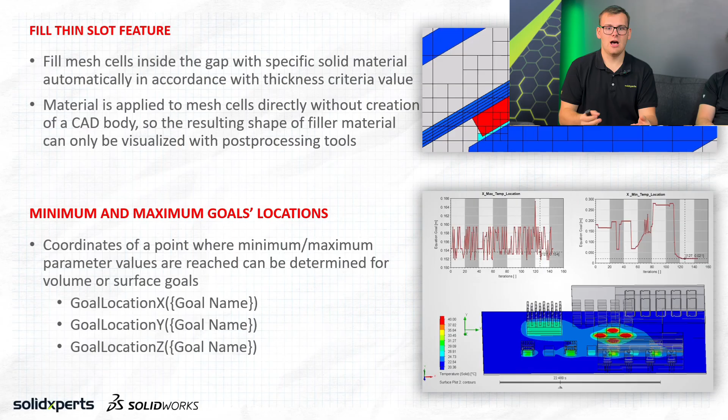And users are now able to find the exact point where a minimum or maximum goal lies, allowing you to pinpoint your results. Before you just saw the point on the model, now you can actually extract those X, Y, and Z coordinates.

Additionally, we can now visualize multiple parameters at once with a new parametric display with a bubble graph. This uses the X and Y to represent two parameters, but also the bubble size and color as a respective third and fourth parameter. So you can have as many as 4 parameters on one graph, making it much easier to spot trends in designs among more parameters.

And then lastly, within 2026, users can define project parameters from within a submodel and then propagate those flow parameters up to a top level model. This allows the parameters to be put into a library for later use, but also those identical models can have different parameters within the same upper level model, where before you would have had to have all of the parameters applied to all unique parts imported at once. So more flexibility in your top level.

Thanks a lot, Aiden. That's really impressive. So from simulation to wiring analysis, you really see how far SolidWorks has come. Now let's switch to 2D with Eddie to see how DraftSight keeps evolving, more flexible and more powerful.

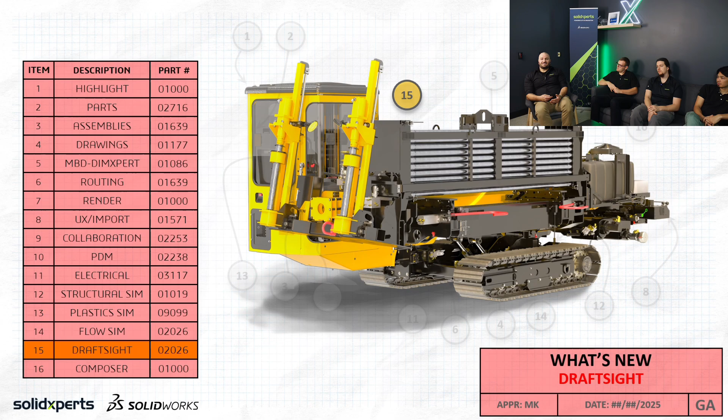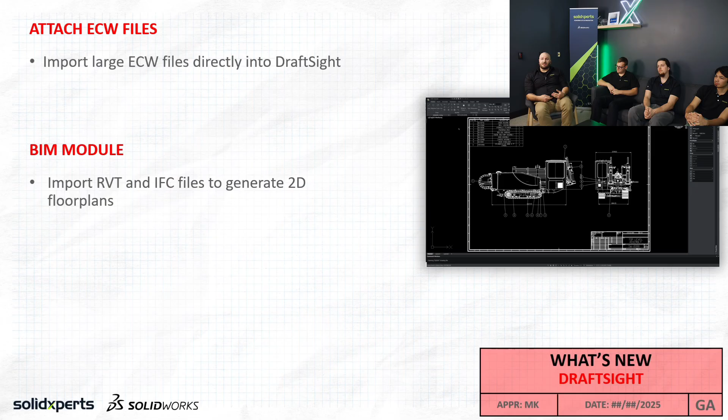Yes, I am back, and you nailed it with that, Lena. So 2D is still very important in 2026. Flexibility and power are the focus for this year's enhancements in DraftSight. From small projects to large building layouts and elevations, DraftSight enhancements are here to make your 2D workflows smarter and more capable, by enhancing the user experience, providing more flexibility, and bringing more power to a very underestimated tool in the Dassault lineup.

So the new DraftSight start page creates a smoother user experience when you open up DraftSight. You can continue previous work immediately using the Recent Filters tab, Recent Document Filter on the Home tab, or search for exact documents you need to pick up right where you left off. On the Learn tab, you can access learning resources such as tutorials, documentation, and skill building exercises quickly and easily. And finally, the My Setup tab allows access to customized workspaces where the user interface is tailored to your preferences or project needs.

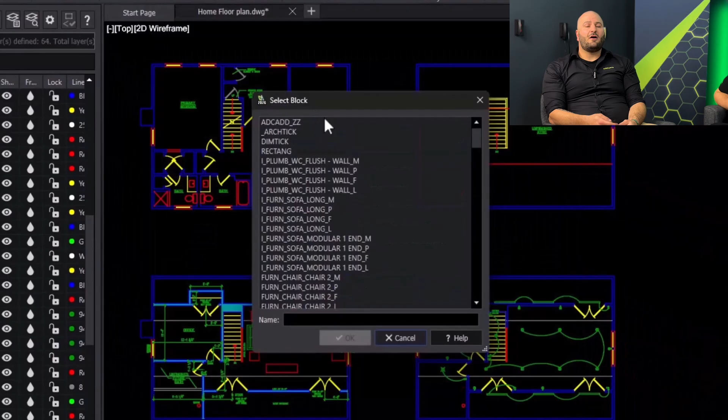The Power Tools ribbon tab has additional tools on it to streamline your workflow, such as the pattern hatch, allowing you to take a block and turn it into a hatch pattern, providing you with all the tools needed to customize your hatch. A few other tools that have been added are the Get Block Info tool, allowing you to select a specific block and get information from it, as well as the Make Line Style tool, which allows you to quickly create custom line styles. Also, the Lisp Explorer tool allows you to search for Lisp routines quickly and efficiently.

With floating document windows, you can open drawings in a separate window outside of the main application. To start a floating document window, simply drag a tab outside of the main window and resize accordingly. This allows you to have multiple drawings open side by side or across multiple monitors.

Diesel expressions in DraftSight 2026 allow users to enable dynamic text that automatically updates based on drawing properties or user inputs. You can create custom text fields that perform calculations and also apply conditional formatting for things like menus or macros, all within the DWG itself without the need for external scripts or programming.

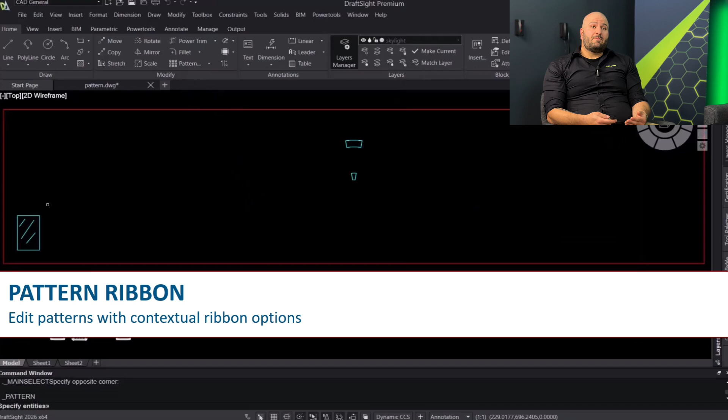After creating a pattern in DraftSight 2026, you'll be able to go right into the ribbon and adjust the pattern directly in the ribbon itself, eliminating the need to go into preview, back out to make changes, and go back into the preview to view your work. This makes the pattern workflow much more user-friendly.

The gradient ribbon has also received an upgrade. Before, in 2025, it was all just text. Now you can go up into the ribbon and not only view the type of gradient you're going to use, but also make adjustments to it as well.

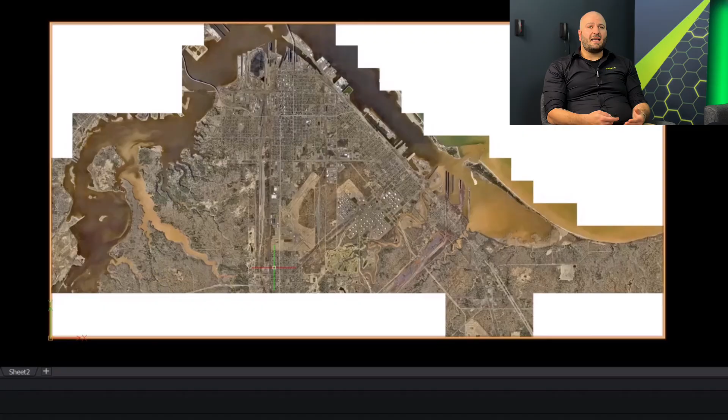DraftSight now supports the integration of ECW files, which can be brought in using the attach image tool and opened up and cropped down using the clip image tool. You can then scale to create an embedded image that can be used as a reference for you to quickly and accurately create your drawings and overlays from.

In DraftSight 2026, you no longer need to have a 2D export of a building floor plan. Now you can work directly with the Revit or IFC file using the new BIM module. For the Revit file, you can generate precise floor plans, sections, elevations, and schedules.

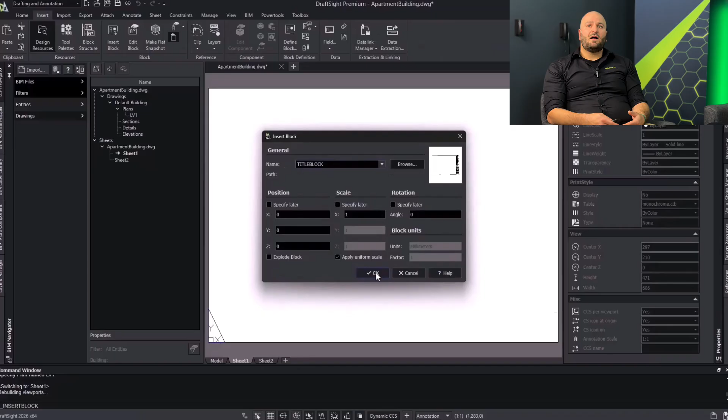Your files will also now automatically update if you have your Revit file saved on a shared server. DraftSight will pull data directly from the Revit file, allowing you to extract material lists and takeoffs without having a Revit license. This works back on Revit files as far back as 2011.

As you can see, some pretty powerful enhancements brought to what most people view as a simple software. And that's finally it for me. Thank you very much to Lena, our fantastic host, for being with us to this point. And I'll let her and Aiden take us to the finish line.

Thanks, Iggy. Now we're wrapping things up on a high note. So after designing, simulating, and managing, it's time to show it off the right way. And for that, nothing beats Composer. I'll let Aiden show us how the 2026 version of SolidWorks makes everything sharper and more professional.

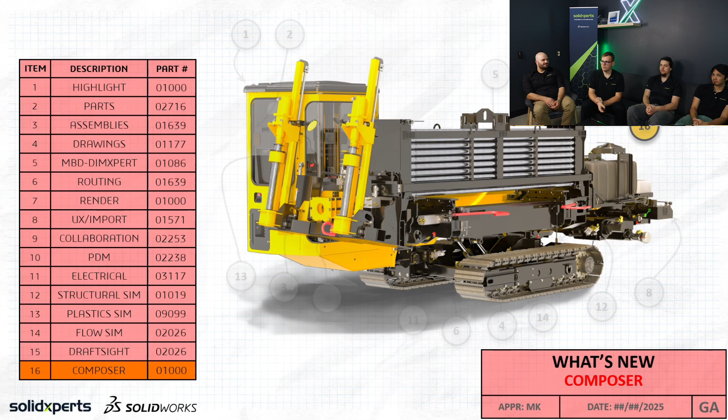Thank you, Lena. So for the last few slides here of the day, we're just going to talk about two simple changes to SolidWorks Composer in 2026. The first is the addition of support for PNG and TIFF images when you're importing to the Textures Workshop.

This allows users to not have to convert to a different file type before importing images, now supporting these industry standards. Additionally, users can export screenshots from videos into PNG, TIFF, and JPEG images. A whole lot of improvement for users to not have to convert between file types anymore, streamlining our processes.

And with that, that's the end of Composer changes. So I'm going to hand it back to Lena to finish us off.

Wow, good job, everyone. A big thank you to our amazing experts for this beautiful demo. Today, we saw how SolidWorks 2026 takes design, performance, simulation, and collaboration even further. And this year is special — it marks 30 years of innovation and creativity with all of you.